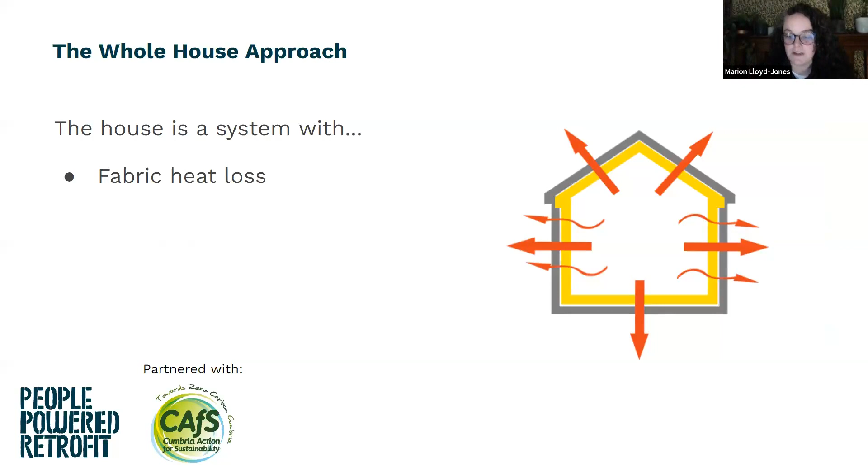So the whole house approach, let's get stuck in. So what is it? Why is it important? So houses, we take a systems thinking approach. So a house is a system made up of lots of different elements. It has the fabric heat loss - the fabric being the physical bits of the building: the walls, the floors, the roofs, the windows, the doors. And we lose heat through them.

But there's also a ventilation system, or there should be a ventilation system. This is all about extracting air that we don't want anymore, and bringing in fresh air. So this is another system piled on top there. There'll also be a heating system, because we've got to combat this heat loss that we're getting through the fabric and from ventilation losses. We need to add some heat so that we're not cold.

We also have lighting and appliances. We want to be able to see what we're doing, and we need some kind of entertainment and appliances. We've got TVs, computers, cookers, fridges, all these things we plug in, essentially.

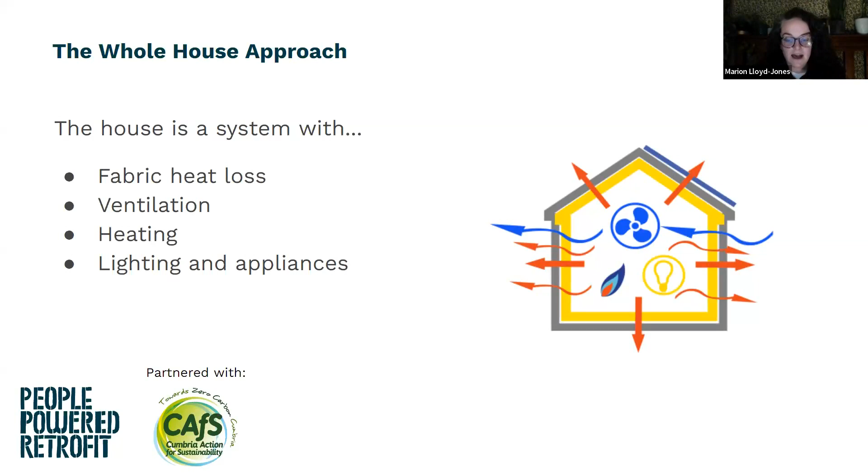And then people. So all of this we can sort of predict. We can predict how the building is going to lose heat, what heat we're going to need to put in. To some degree, we can make an assumption about lighting and appliances, and that's all. We can make calculations about that, and then it gets really complicated when we add people, because people do things differently depending on where they are, who they are, how many of them there are. But they're also adding to the system. They're adding heat from their bodies, and they're also adding lots of moisture through their activities.

And all of these systems interact with each other. They're not in isolation. There's lots of interactions, which complicates our predictions.

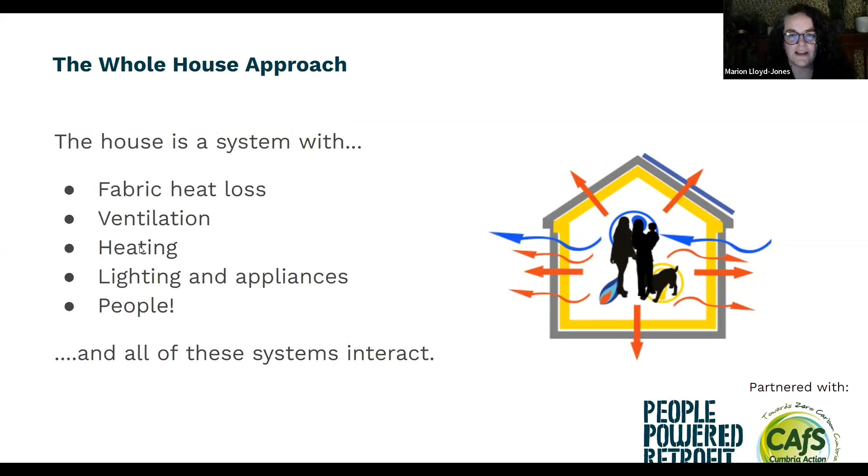Fab. Okay, George, I can see your question in the Q&A, just so you know. So why do we take this whole house approach?

So this whole house approach acknowledges that how these houses are these really complex systems. But we understand really well how these systems work and how they interact. And the whole house approach allows us to take a really context specific and a risk management approach. A lot of very clever people have done a lot of brilliant research about the risks involved in retrofitting our buildings, and we can learn so much from them.

And we can make sure that we consider all of these risks when we take on a project. It means that we can be aware of any potential unintended consequences. So if we do some air tightness work over here, are we going to introduce a moisture risk over here? We can predict that.

And it also means that we can make sure that any new measures, so any insulation or ventilation measures that we are introducing to the building, we can make sure that they're really well considered, they're really well designed, they're really well installed, which is very important. And crucially, that they are understood by the resident. We don't want to install stuff that people don't know how to use.

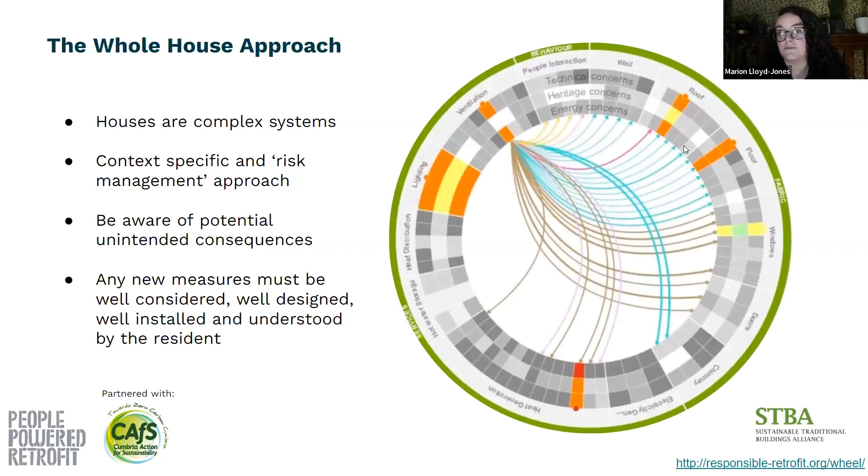It makes them useless. This is a really useful tool I'd like to introduce. This is from the Sustainable Traditional Buildings Alliance. This is their retrofit wheel.

Essentially what it does is they've looked at all the research, and they have this wheel where you can select what you're planning on doing, and it will show you the interactions between systems and measures. I would recommend looking it up. If you were to just Google STBA, I think they call it the Responsible Retrofit Wheel.

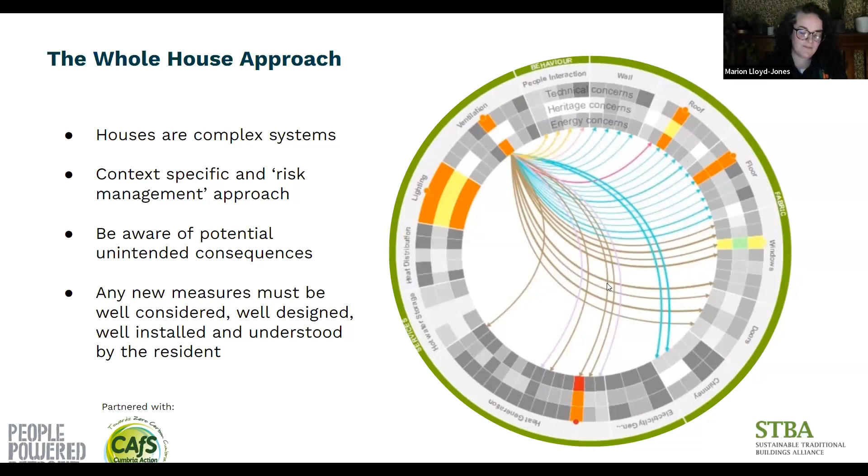Now, we take a whole house approach, and that means we can then make a plan. What do we mean by making a plan? Well, we need to get from here to there. How do we do that?

With a retrofit project, it would be lovely to say that everybody does it all in one go, but that's just not the case. In general, a lot of the projects that we do at the Retrofit Hub, people will plan as a whole house project, but in reality, it gets delivered in packages of work.

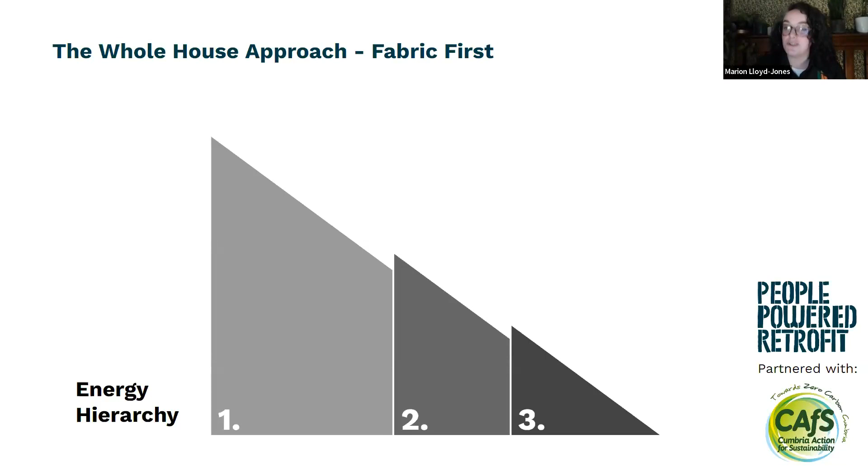So what might inform that plan? Well, we like to talk about a fabric first approach. What does that mean? Well, it basically takes into account this energy hierarchy, because it shows this is the most straightforward, the most predictable way of getting from here to there, reducing our energy needs in our homes.

So the first step, the most important step, the fabric first step, is to reduce the space heating demand for that home. What do we mean by that? Well, if we focus on fabric energy efficiency, which is a fancy word for improving the fabric of the building, we're looking at improving the insulation, improving the air tightness, and we'll come on more onto air tightness in a bit, and adding things like triple glazed windows. What we're doing is we want to make sure that that building is not losing the heat.

So that means we don't have to put as much heat in with our heating system to be able to maintain a nice, stable, comfortable indoor temperature. I always say that the cleanest, greenest, cheapest energy is the energy that we don't need to buy. And we do that by reducing the space heating demand, less energy.

The energy that we do then use, we want to use more efficiently. So we want to make sure that our heating system runs really efficiently, it's correctly sized, we've got radiators in the right place, and it's a modern heating system where we're getting as much energy out of it as possible. Things like old boilers are sort of 70, 80% efficient, the really old ones. Newer boilers, 95, 96% efficient. Heat pumps, 200, 300, 400% efficient. So really efficient heating systems we can have now.

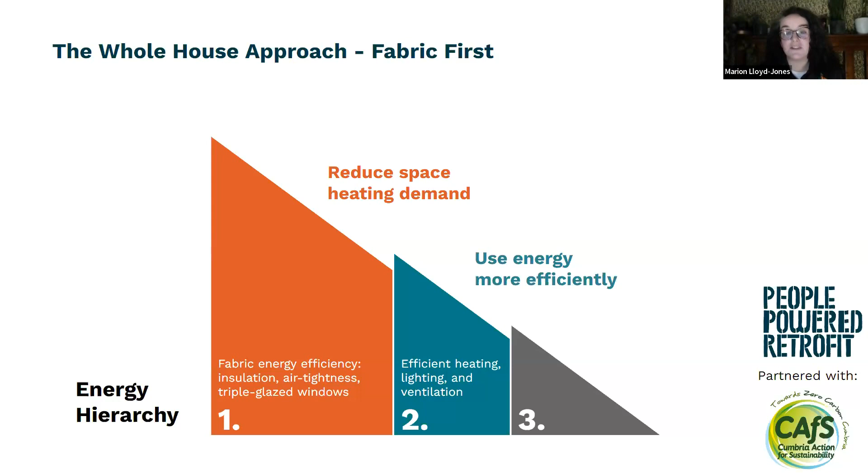And then after that, we want to make sure that energy that we're using really efficiently, we supply it from renewable sources. We want to make sure that it's the lowest carbon energy we can get. We're really good at decarbonising energy in the UK, so we're getting much better at this. And if we can supply some of that renewable energy on site, brilliant.

Solar panels on roofs, a fantastic way. But I would recommend doing that fabric work first. You definitely don't want to be dealing with having to replace a roof that's already got solar panels on - that is a bit of a kerfuffle, shall we say.

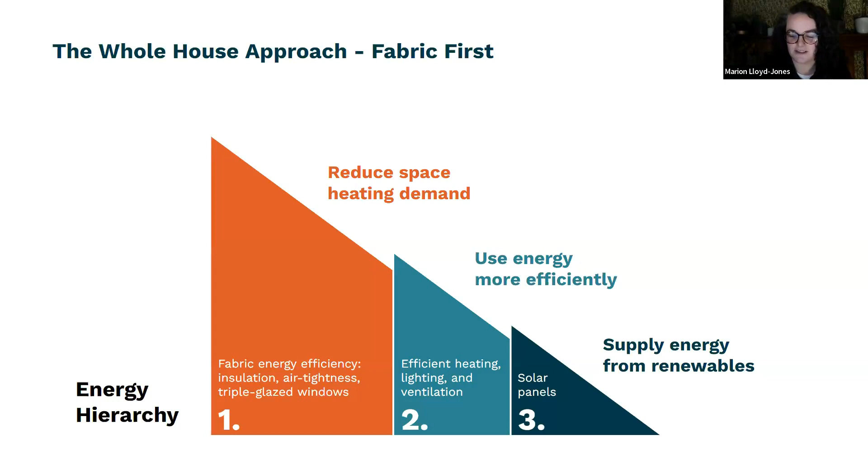So why do we want to do it this way? Well, if we've reduced the space heating demand, we can make our building services - our heating system, our ventilation system - more effective. We can also design for lower maintenance. If we make really sensible choices in our retrofit measures, it actually reduces the maintenance needed on a building.

If we externally insulate, for example, we don't have to worry about repointing on a regular basis. If we install really high quality windows, we can make sure that we don't need to do so much maintenance on those windows. And this runs through a lot of the measures that we can install.

We have really reduced our ongoing running costs. We need less energy, we're much less sensitive to fluctuations in the energy markets. We can improve living conditions, we can have really nice indoor air quality, we can have nice, warm, comfortable homes. Our homes are making us poorly at the moment.

We spend 90% plus of our time indoors. We should have really nice indoor environments.

Also, working this way, we can really reduce fuel poverty. If we're reducing the amount that we need to spend on our energy bills, then people are less sensitive to shocks in the energy market. They're not spending as much of their income on energy.

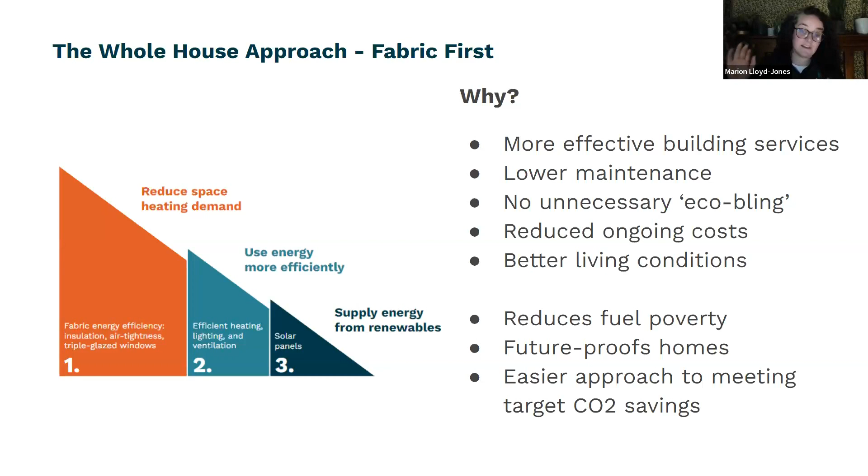There's lots of different ways we split buildings up, but generally we say pre-1919 - that's, for us in Manchester, generally your red brick solid wall properties. That would also cover a lot of your stone built buildings.

And then we hit the interwar years, 1919 to 1944. A lot of that is your early cavity walls, a lot of the buildings that were put up in those interwar years. And then after here, we tend to see a big...

There's a lot more different bands after here, basically, and a lot of these are tied to building regulations, which didn't start mentioning energy until 1965. That's when we first had targets for insulation in properties. And what we would hope to see is that buildings built from then on, as there's been improvements in the targets from building regs for insulation and airtightness, they should be better buildings from that point on. I won't go into why that's probably not the case, unfortunately.

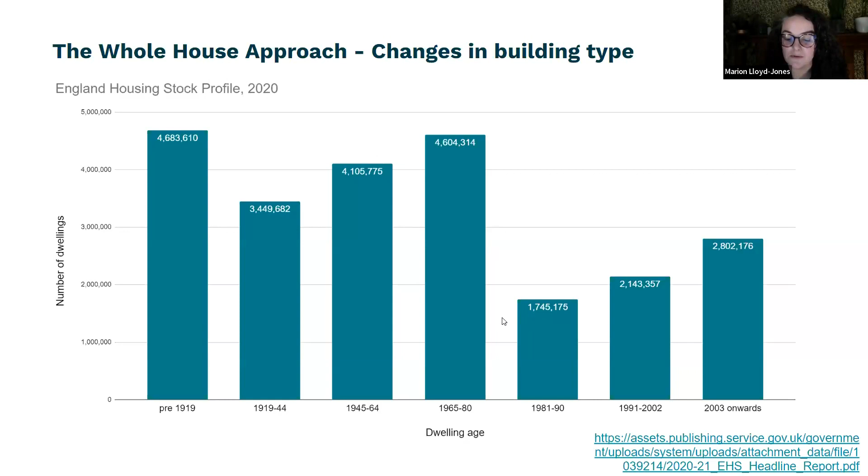So why is this important, the age of the house? Well, fundamentally older and newer buildings are built differently. Older houses, especially pre-1919 and interwar houses, were built to be heated by coal fires or wood fires. You wouldn't expect to be warm unless you were sitting in front of the fire.

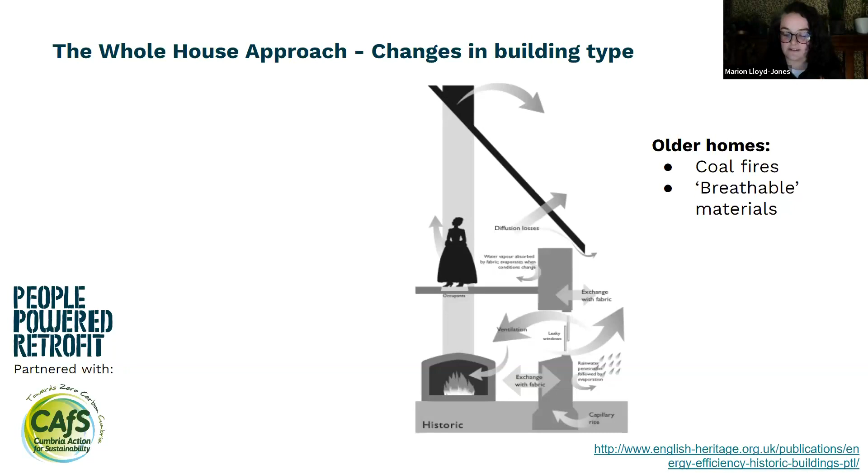They were made from traditional materials, so we call them breathable materials - I'll come on to that in a bit, what I actually mean by breathable. But the important thing is the materials were very different: traditional materials, lime mortars, lime plasters, that allowed moisture to move around the building in a very different way to modern buildings.

And modern buildings, very different. We don't heat with fires, we heat with central heating. We expect the whole house to be a nice even temperature all the way around. We no longer have single glazed windows, we have double glazed, triple glazed in retrofit houses and more modern houses. And we've done a lot of draft proofing, especially through the 80s and 90s and early 2000s, because we realized we do not like drafts.

And what it doesn't say here is the materials that we use now, more modern building materials - your gypsums, your concretes, your cements - they do not allow moisture to move in the same way. We are changing the mechanics of the buildings.

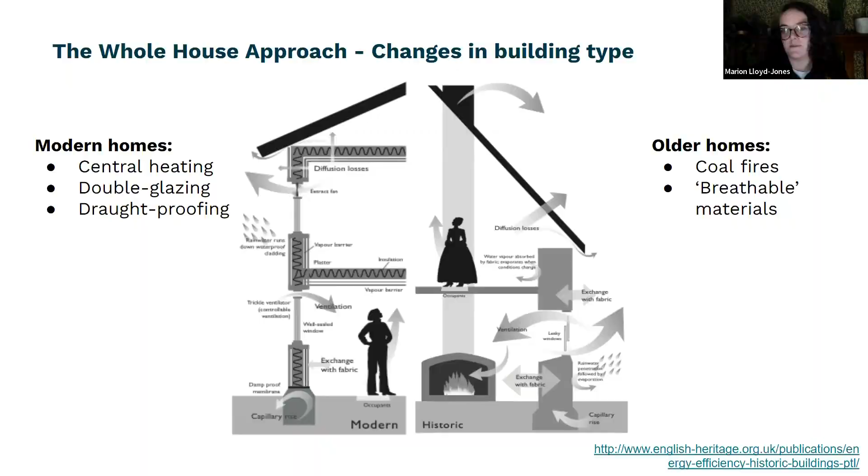So I'm going to now do a knowledge check, a couple of these as we go through. I'm going to ask you a question and I'd like you to put your answer into the chat, but don't hit enter yet. I want everybody to have a go, give me an answer, and then when I say go, everybody hit enter, and then I'll be able to see what's going on. Your first question is, just to check you've been listening: what does it mean to take a whole house approach? I'll give you a little minute.

Okay, if you've typed something in, hit enter now. Let's see what we say. The fabric of the building, house and system, looking at all the interacting systems - yes, viewing the whole house and system fabric first. Excellent, there's people in the room and they're listening. Marvelous. Okay, you all pass.

Let's talk about how heat moves around our homes. I'm sorry Tina, I realized I didn't take a note of what time we started - just so I don't get too excited and talk about any one thing for too long. Don't worry, that's fine. We started a bit late, so I think if we carry on till about 8, if that gives you enough time, but if you run over slightly don't worry. I might need to go a little bit quicker through some bits, but that's fine.

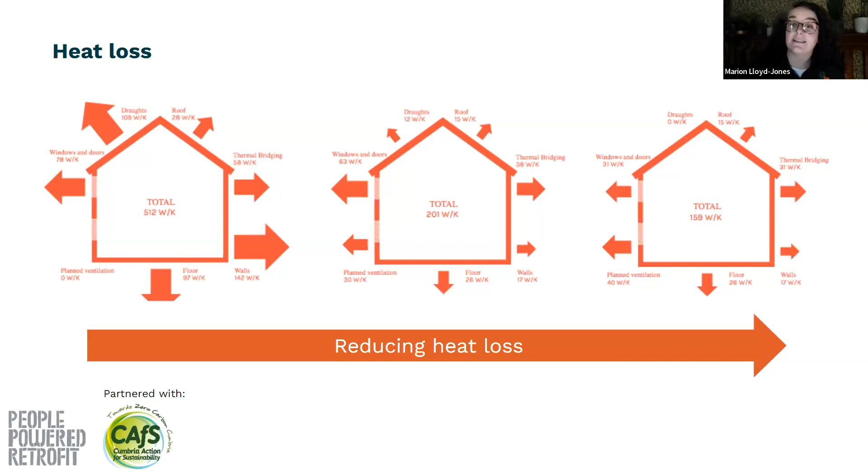Okay, heat - talking about how do we lose heat from our buildings. These are graphics from the Home Energy Planner report, an assessment tool designed by People Powered Retrofit, which is used by CAfS to do energy assessments around Cumbria. This basically shows you, of all the different bits of the building, where it's losing the most heat, so you can get an idea of how to best target your retrofit interventions. The idea is you look to reduce heat loss from as many of those places as possible. This looks at both fabric losses and ventilation losses, so there are losses here for planned ventilation and losses from drafts. Drafts and ventilation are two very different things, which we will come on to later.

It's not just about heat loss though - we're always trying to balance the losses against the gains. What are the gains? Gains come from lots of different places. We get heat gains from us - every person that's in your house is emitting, in general, about 100 watts in heat just by being there.

Your pets will also be emitting heat. It will depend on your activity as to sometimes you'll be emitting more heat, less heat, depends what you're doing. We get gains from cooking, and anything that's creating heat in your house, either intentionally or unintentionally. So when you're cooking, when you are on your laptop watching a webinar like this, your laptop, your computer is going to be emitting heat as well.

And we also get solar gains. So when the sun is coming in through our windows, we're getting some of that heat into the house as well. And we balance these.

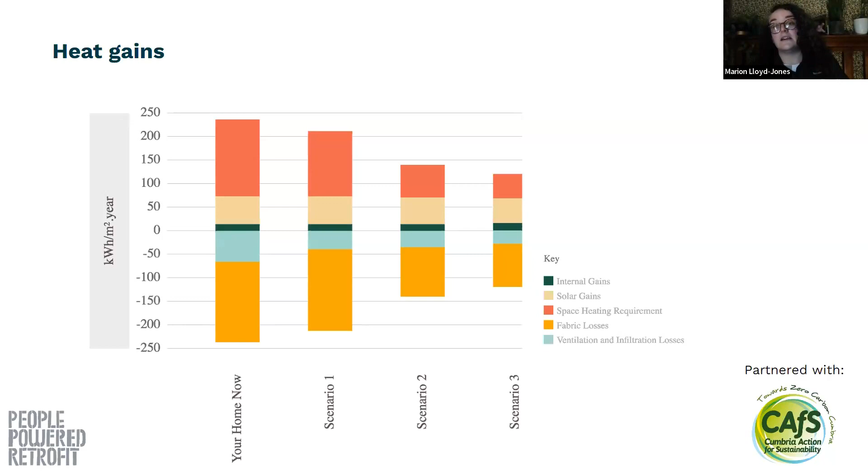This is another graph from the Home Energy Planner reports. What we see is everything above the line is a gain, everything below the line is a loss. So the yellow is the fabric losses, the greeny blue are the ventilation and infiltration losses. Then we get a bit of a gain - the big gains at the top, that's the space heating requirement. So that's how we need to balance the losses and the gains to get a nice stable temperature.

So space heating demand is a really important metric here. It helps us to understand how different buildings perform against each other and what is realistic. So the UK average is about 140 kilowatt hours per meter squared, kilowatt hours being the amount of energy you need to put in. A kilowatt hour is what you'll see on your energy bills. So it's kilowatt hours per meter square of the floor of their building per annum.

That's the point. Building regs has a target energy efficiency rate of about 100 kilowatt hours. It was in 2000, and that's gradually coming down to about 65.

And then there are various standards you can look to, like what is a good heat loss, a good space heating demand to aim for. So the AECB, that's the Association for Environmentally Conscious Buildings, a very good organisation, I recommend looking them up. They have a retrofit standard - their retrofit standard aims for 50 kilowatt hours per metre squared per annum.

That's the retrofit target, I think. And they have a new build target, which I think is 40. And then we have Enerphit, which is the passive house standard for retrofits, and that's 20 to 30 kilowatt hours. And then passive house, which is the standard for new builds, but that's basically the super low target - it's 15 kilowatt hours per meter squared per annum. That's tiny compared to the UK average of 140.

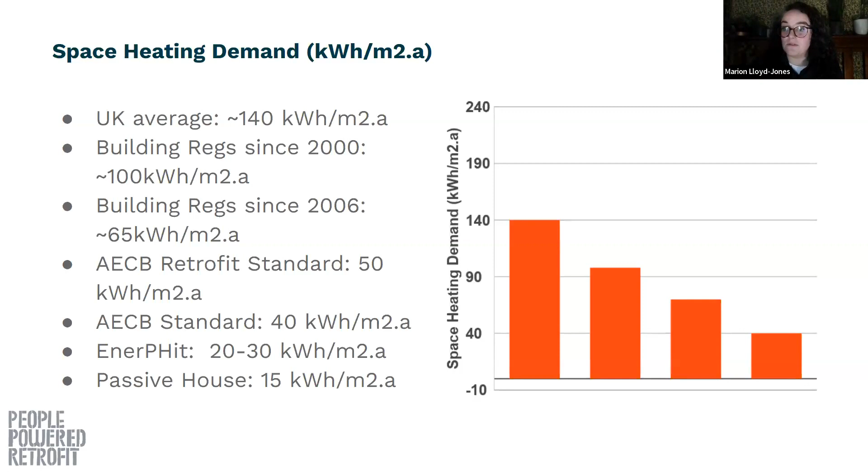I delivered some training up in Aberdeen last year, where their average up there is sort of 250, 300. Wouldn't surprise me if you have a very similar average for Cumbria when we're thinking about it - it's that bit colder, that bit wetter, and it's a different type of buildings. In Aberdeen, it's lots of granite build. I know in Cumbria you have a lot of stone buildings, so you will often have a lot higher space heating demand.

Lots of things play into it, not just what the building's made of, but also what we call the form factor. This is just a ratio between the floor area and the external wall area. The more external heat loss area you've got, the worse your form factor is, the less efficient it is.

Essentially, if you've got a flat that's in the very middle of a building and the only external wall you've got is on the front where your windows are, you've got a lot less surface area to be losing heat from than if you're in a detached bungalow. That's what this is saying about.

You can choose your form factor when you're building a house. There's not a lot you can do about it with a retrofit, but you can think about it if your retrofit also includes some construction work. For example, if you're looking at doing an extension or a conversion, you might be able to tweak that to try and improve your form factor as you go, which will reduce your heat loss area.

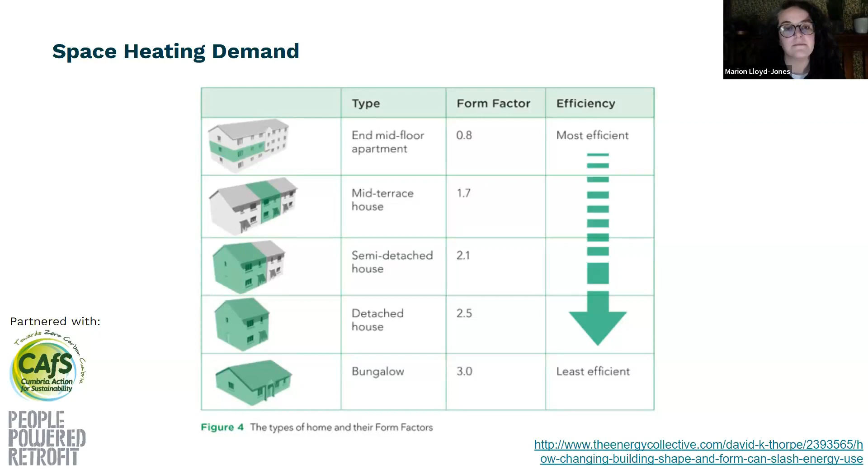Other things that we might look at: peak heating demand. This is the rate of heat input you need - so on the coldest day, how much heat you need to put in. It's not that interesting by in and of itself. What it's basically looking at is for sizing your heating system.

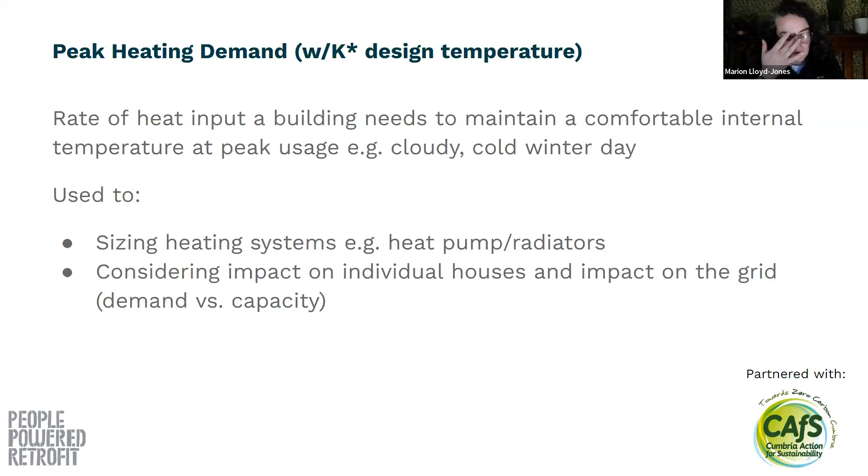We want to try and make our peak heating demand fall into bands, especially when you're looking at whether you can switch to a heat pump, for example. This is very much used when you're sizing heating systems. What's possible in retrofit?

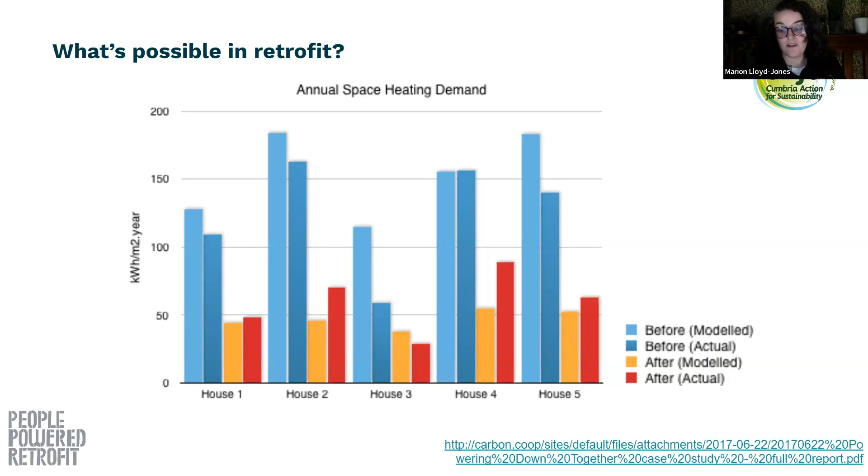This graph showed there was a difference between modelled and actual results. This is very important post retrofit because unless you're very careful, you can end up not reaching your goals because of the performance gap. What this basically describes is that difference between what you modeled and what you actually got. And there are a few reasons why we get this performance gap.

It's very often to do with assumptions that are made at the beginning that aren't necessarily close enough to reality, attention to detail in design, and quality control during construction. You can put as much energy as you like into designing the perfect retrofit, but if what you have designed is not what is installed, you will have a performance gap.

If you have designed for a really high level of air tightness, but your contractors don't understand how to install to that level, you will not hit your targets. So it's really important that what is designed is what is installed. Making sure there's suitable commissioning and handover, making sure that what is installed works the way it's supposed to, and making sure the householder knows how to use it.

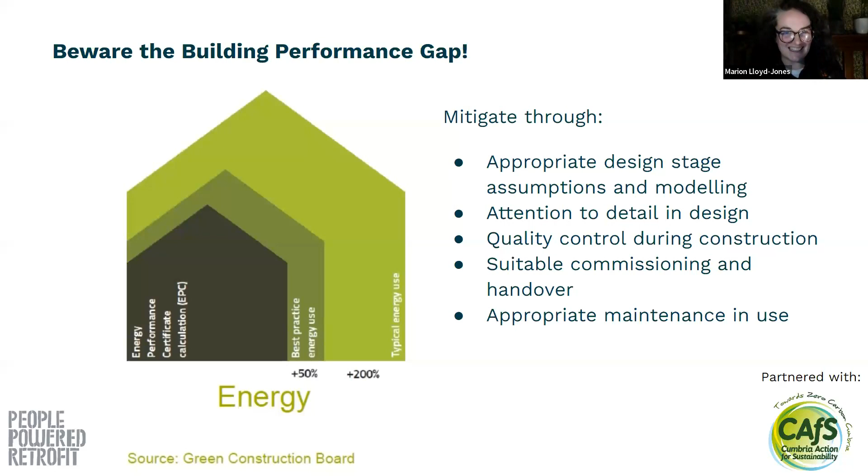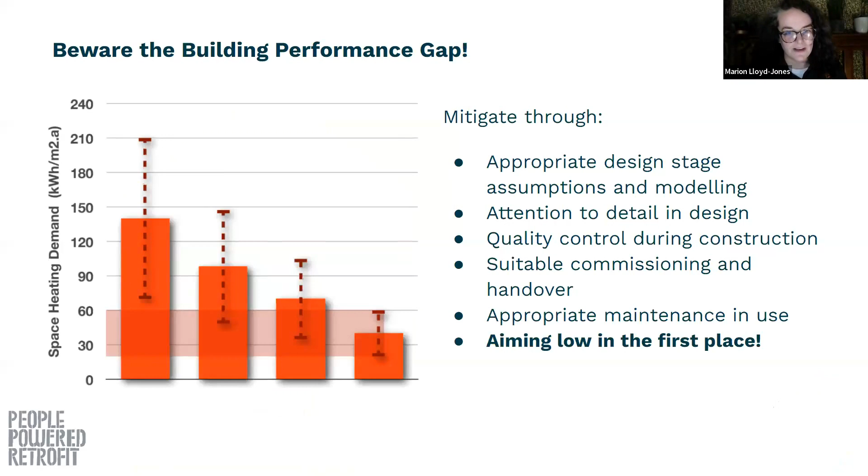And here we go, this is showing these error bars, the difference we can get. That performance gap can cause a really big fluctuation in performance.

So I'm going to do another one of these knowledge checks. What does space heating demand mean? If I'm talking about space heating demand, what is that? Answers in the chat, please.

Okay, hit enter if you've typed something in. Let's see what you got. How much energy it takes to keep the house comfortable. Perfect, that's exactly it. How much energy do we need to put in to keep a nice, stable, comfortable temperature?

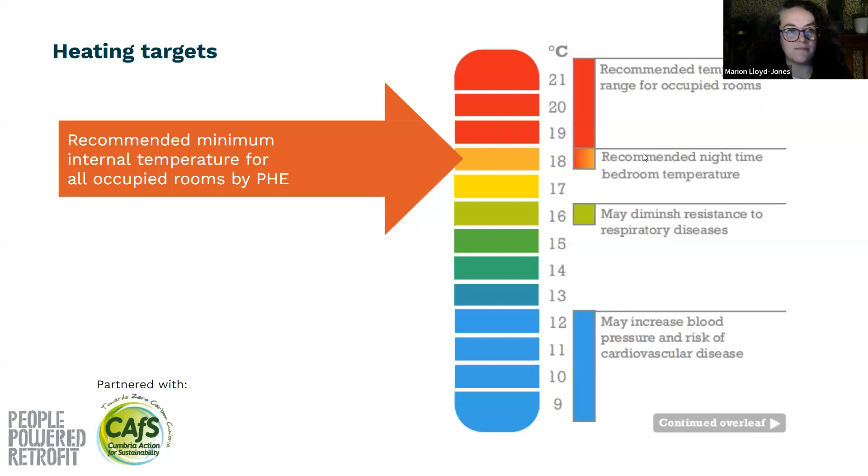Okay, so I'm going to do a bit about heating. Heating level is everybody has a preference for where they set the thermostat. We used to have battles in our house whether it was going to be 19 or 17. We now settle on about 17 and a half.

There's a lot of research that's gone into this - what is actually a sensible temperature? We want to advise people it should ideally be above 18 degrees for most of your house, slightly cooler in your bedrooms because we sleep better in a cooler room, but we don't want to go too cold. Under 16 degrees can really start to cause health problems, but it can also cause problems with the fabric of your building. The colder your building fabric is, the more likely you are to get damp and mold. But it's also really important for human beings to be warm enough.

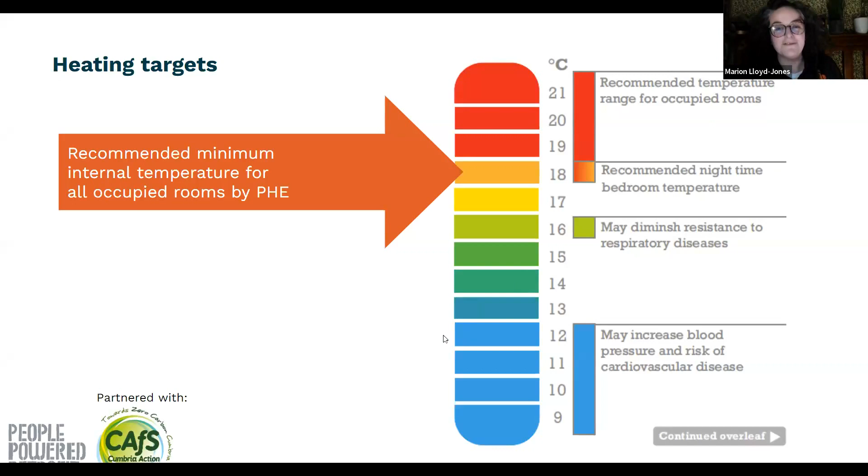But the way that we perceive warmth is quite interesting. A lot of people find it interesting, but I think it's really important to understand the way we perceive warmth and how comfortable we are. It's very individual, but it's also affected by lots of different things. The way that we measure temperature is generally air temperature - that's what a thermometer often picks up.

But I want to show the difference between these two locations. We've got someone standing in a sunny but windy area and someone standing in a shady but calm area. The air temperature in both locations is 22 degrees, and the relative humidity in both locations is 80%, but the wind speed is different, and the radiated heat is very different. So these people are going to feel a very, very different temperature in these two locations.

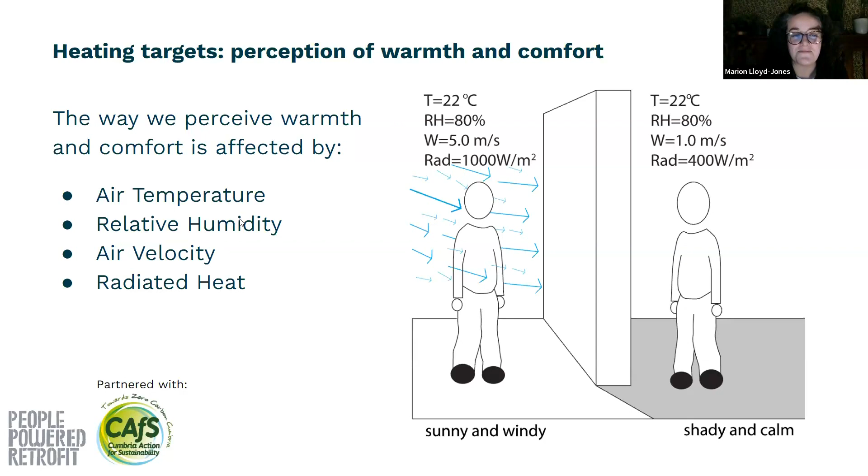Different people perceive heat slightly differently. But it's not strictly the temperature, it's got lots of other factors involved. What does that mean in our houses? Well, let's come on to that.

So when you do physics at school, they tend to teach you different ways that heat is transferred. There are four main ways: conduction, convection, radiation, and latent heat or sensible heat. I'm going to concentrate on conduction and radiation.

Conduction is about how heat transfers through a solid. If you stick your metal teaspoon in a hot cup of tea, the heat will move along that spoon to the end and will eventually warm up. It's all about particles vibrating next to each other and passing the heat along. This is how heat moves through the physical fabric of the building.

And we're going to talk about radiation, radiative heat, specifically in terms of surface temperatures, how we perceive temperatures around us. So this is an image from a thermal imaging camera. When we talk about temperature, we're normally talking about air temperature, but this is really important - this is showing us the radiated temperatures around us, how different surfaces are different temperatures.

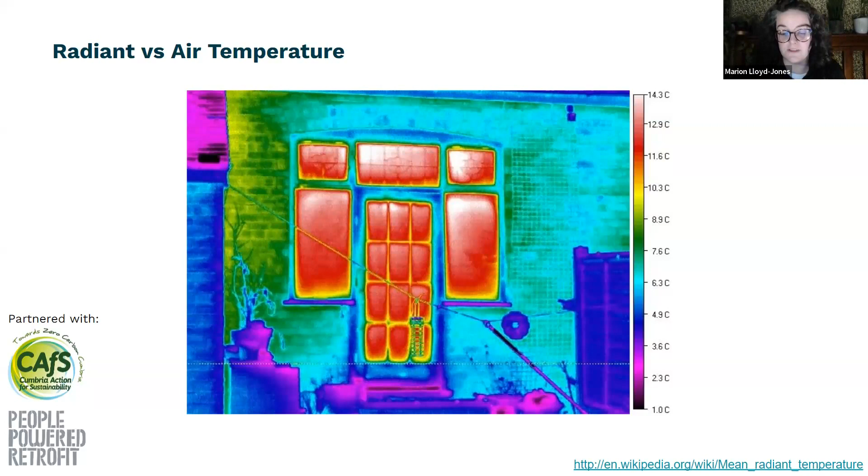Everything that's above absolute zero is radiating heat, in quite small amounts, but everything above absolute zero is radiating some heat. We can see from here that the warmest areas in this image are about 14.3 degrees, the coldest is down to one or two degrees, but it's all radiating some kind of heat. This doesn't tell us anything about what the air temperature is, this is just what these surfaces are at.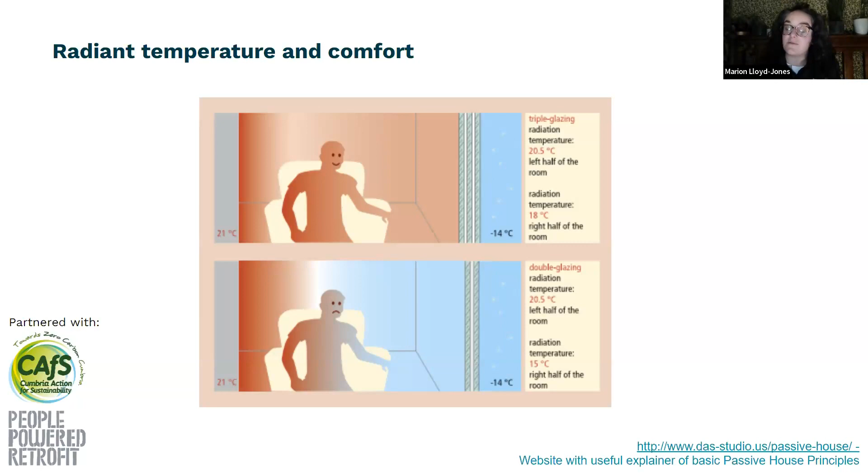We feel it's this radiated heat that we humans are very sensitive to. If you think in really warm countries across the Middle East, for example, you will often have large pools of water because they help you feel cooler, because the surface temperature of the water is a lot cooler than everything that's around you. The air temperature hasn't really changed, but there's a much cooler surface, and you'll feel cooler. So how do we improve comfort?

Well, the answer to this is insulation, and it does this in two ways. Adding insulation to the building fabric reduces the heat loss via conduction through the fabric because it slows the heat transfer. But it also raises the surface temperatures inside. So whether you're insulating internally or externally, the internal face of that wall is going to be a lot warmer, so you won't have that cold surface making you feel colder.

Sorry, I'm just checking the notes on it just to make sure. Yeah, so it doesn't...

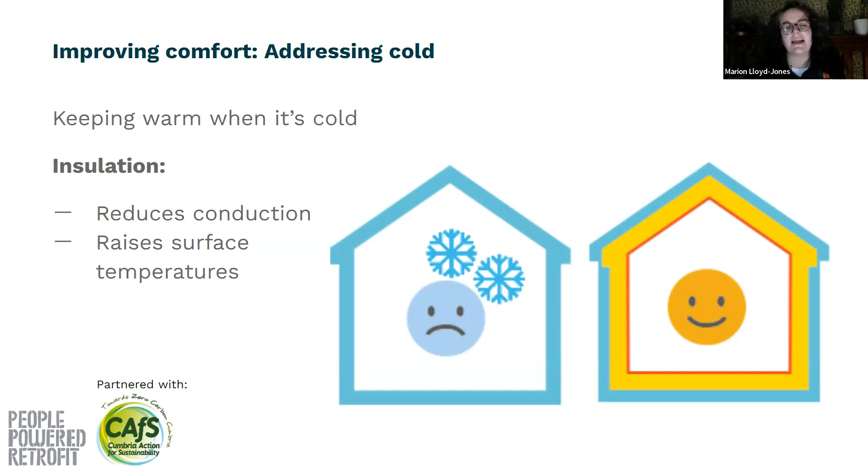...affect the conduction and the radiation temperature to the same degree. It's much more about slowing the heat through, but you will notice if a wall previously had been particularly cold, it will feel warmer once it's been insulated.

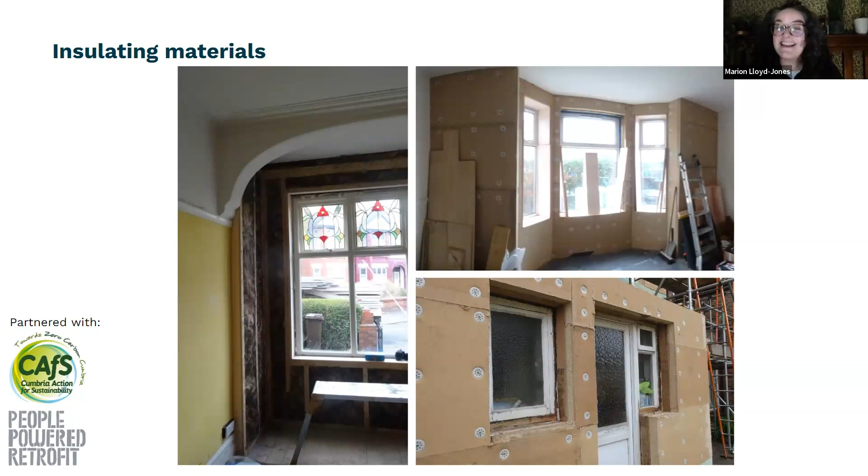Here's some examples of internal and external wall insulation. This one on the left is internal wall insulation, mineral wool between timber battens. Top right is wood fibre insulation internally, and bottom right is wood fibre externally. It doesn't matter where you put it, as long as it's there, it's going to slow the heat loss through that wall and warm up the internal surface.

But it's not just about staying warm in the winter, it's also about staying cool in the summer. If we've got insulation on that wall, it's going to slow the heat coming in during really warm summers. We've had some scorching summers over the last few years—not this year, this summer was a bit of a washout in Manchester. I don't know about Cumbria, but we have had some warm summers recently.

We can think about the position and amount of windows and glass if we get the opportunity to change that, so we're not getting that solar gain. We can add shading, but we can also choose materials that slow down the heat coming in. A really key place to think about this is in a loft conversion. Some materials you might use there are good for retaining heat in winter, but not very good at keeping excess heat out in summer. I go into a lot of really scorching loft conversions in the summer.

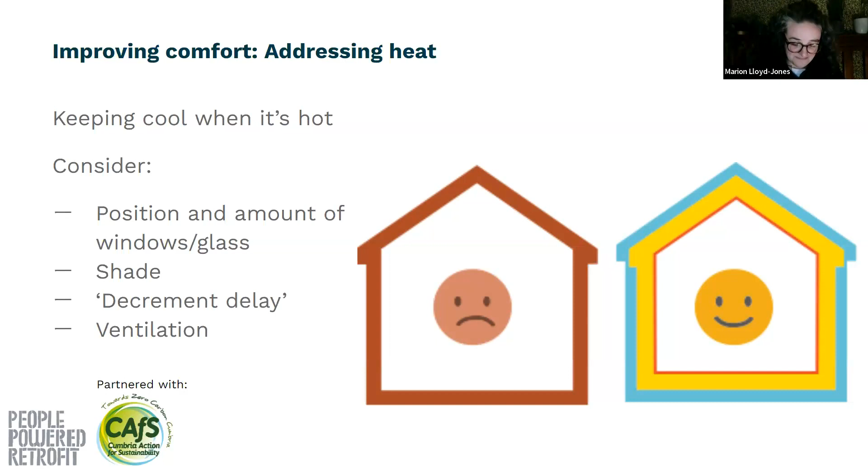And we can also address heat through really good ventilation. So heat and air, right? I'm going to have to speed up, so bear with me.

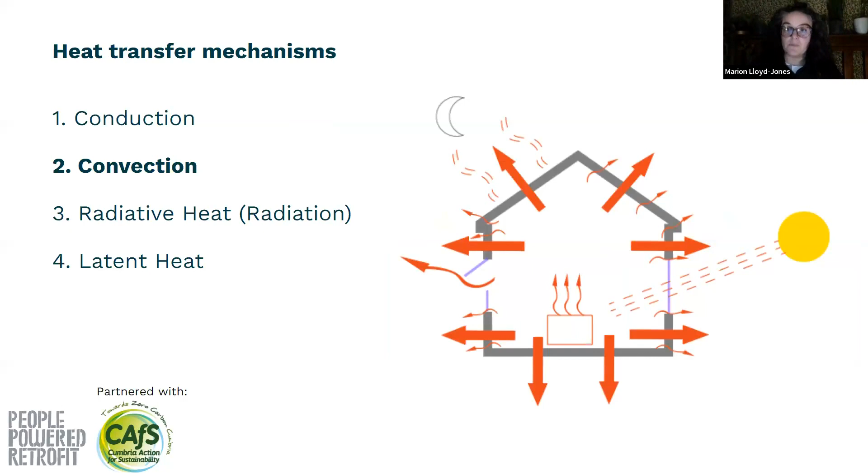Convection is one of the other types of heat transfer that we didn't talk about. Convection is the movement of air. This is where warm air gets more gap between the particles, making it more buoyant. Warm air rises, then it cools and falls, and we end up with these convection currents.

Convection heat loss is really important because we lose heat through various mechanisms: thermal bypass, chimney effects, drafts, and ventilation. I'll go into each of these.

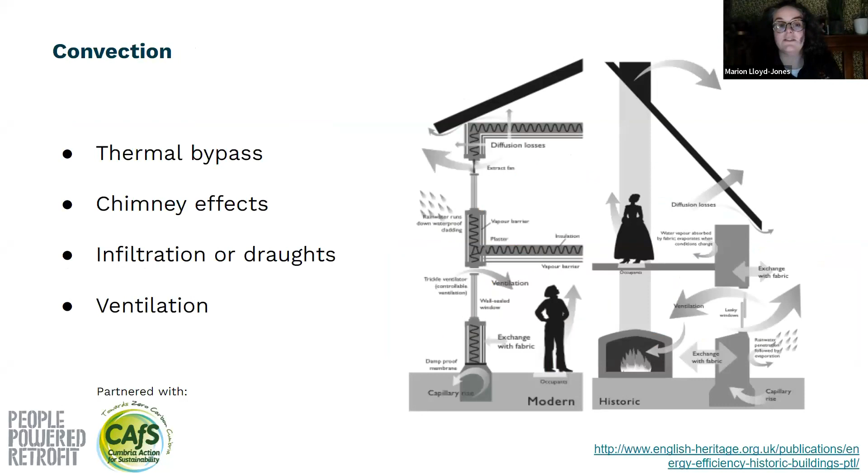Thermal bypass is a little complicated, but essentially it's about gaps and air movement around insulation—air movement stealing the stored heat from your insulation. Sometimes it's called wind washing. This is why we'll often cover insulation with a membrane if it's not being covered over with plaster, for example under a floor or in a loft. It's also really important that insulation is well installed so there aren't gaps for air to get in and remove the heat.

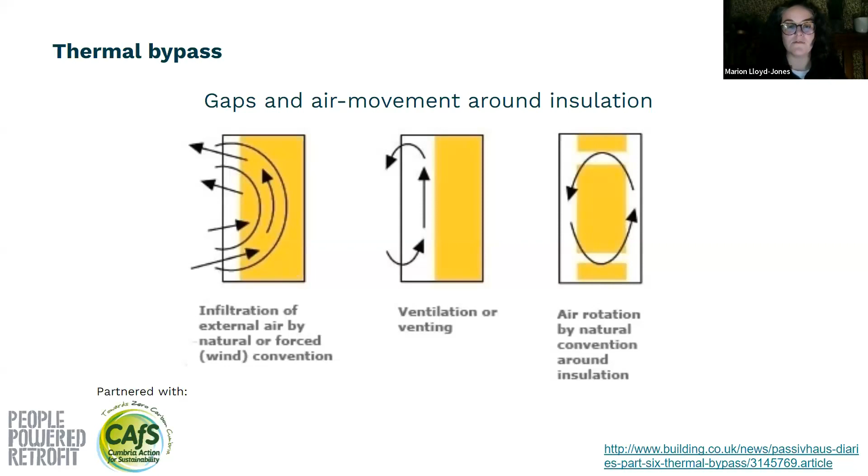Chimney effects—I think most people are comfortable with this idea. Chimneys are designed to draw air up them so we don't fill our houses with smoke. They do this because warm air is more buoyant. If we're not careful, we can end up with a chimney effect through cavity walls, where warm air from our homes gets into the cavity wall, rises up, sucks more cold air in from the bottom, and we end up with this cycle of losing our warmed air up the cavity wall.

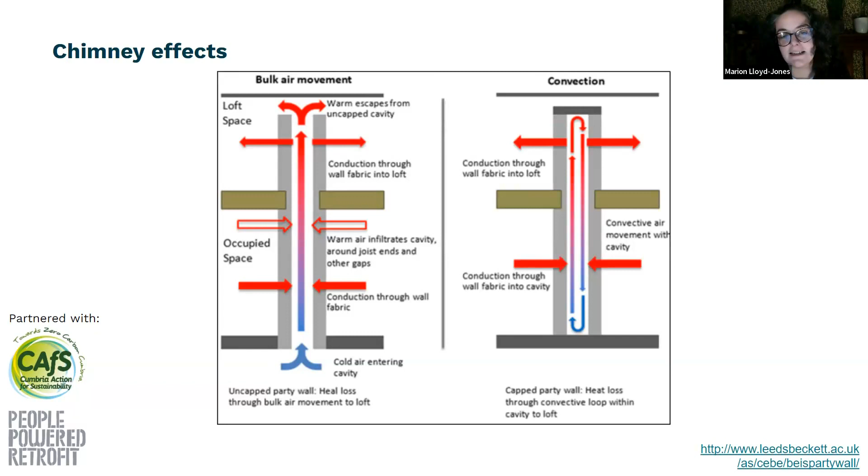If we cap cavity walls off at the top, we end up with a convection current through them, but hopefully we're gaining that warmth back into the house rather than losing it straight out the top like it's going out of a chimney.

I said earlier that drafts and ventilation are two very different things. They are—so on the right, ventilation is planned. This is about providing fresh air into our homes and extracting moist air, removing water vapor and pollutants. Infiltration is drafts—this is air coming into and out of our homes, so it goes both directions.

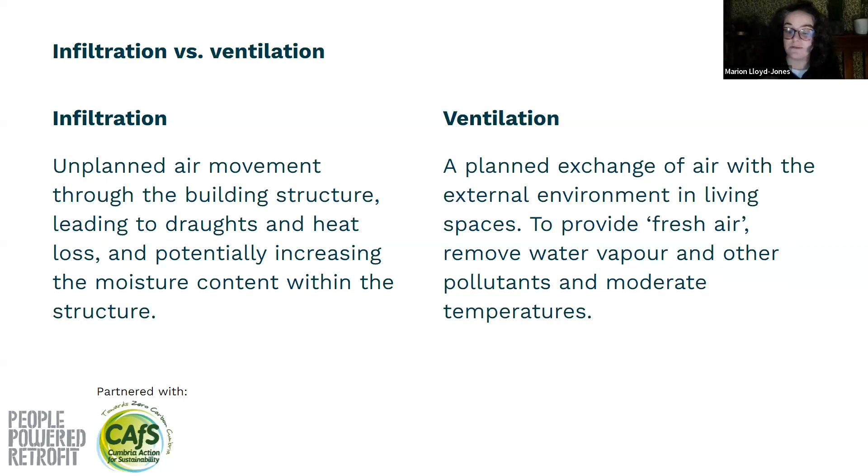We don't like that, and we get degradation of the structure because we end up with moisture moving around. We don't want that. In a house with high levels of air tightness, we're really making sure we're keeping that heat in, not just through a really well insulated structure, but by keeping those drafts out.

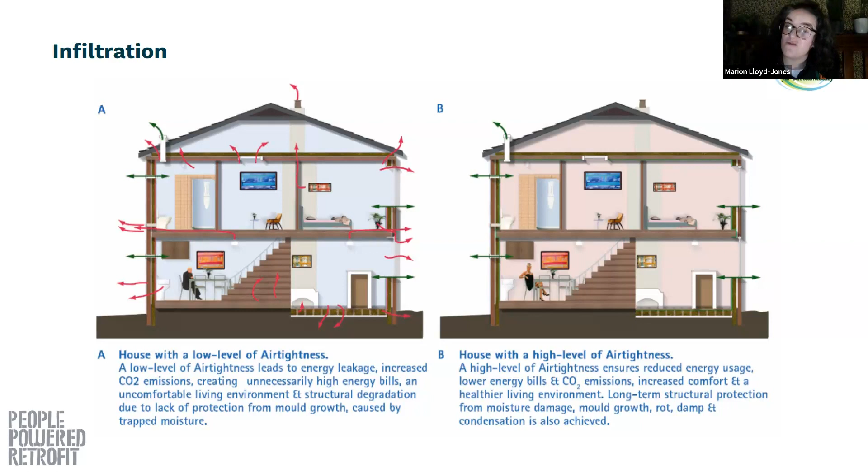We're controlling where the air is going out, so where our extracts are, and where our air is coming in. I always say I don't really want to be breathing air that comes from under my floor or in my loft. I want nice, fresh outside air. And we can also really make sure any system is working well if we've got good air tightness.

We can measure the leakiness of our buildings through air tightness testing. This is Gervais, who's an air tightness specialist doing a blower door test. You have some really good people doing air tightness up in Cumbria - I think Diane Hubbard is probably doing some of these webinars. She's fantastic. Her company is Green Footsteps, and she does air tightness testing.

Essentially, what you do is put one of these in - it's called a blower door test. You put this in your door, it's got a big fan, and it sucks or blows air in or out of your home, forcing air in or out through all the little cracks and gaps. You can measure how much air is being lost.

There are lots of targets because we can quantify it. The metric is called air permeability - this is how leaky your house is. Low numbers are good, meaning it's less leaky. The average house is between 12 and 20. Won't worry about the units, it's very complicated. Building regulations need updating actually - it used to be 10, it's now 8. Good practice would be 5.

And right down at the bottom, passive house - on a passive house, you're not allowed to have an air leakage of more than 1. So if you compare the average of 12 to 20 with a passive house of 1, our houses are ridiculously leaky. Older houses were designed to be leaky because they had fires in and needed the fresh air. But now, as we've tightened everything up with air tightness works, we should be getting down to these really good, tiny numbers.

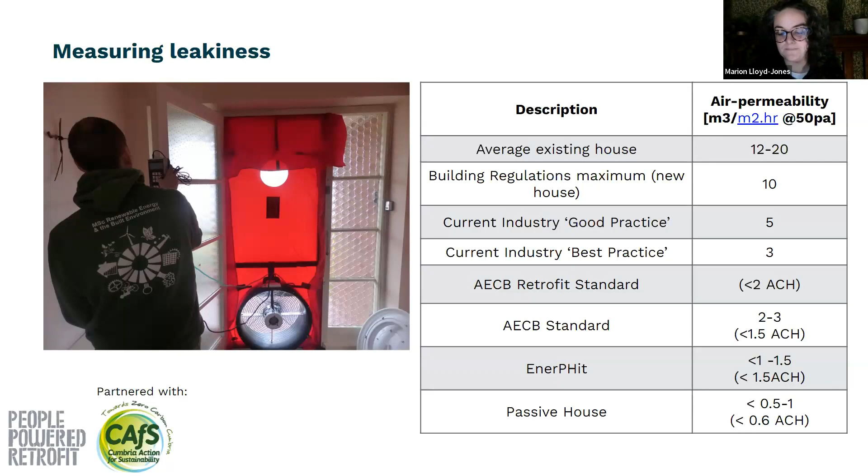How do we do it? There are lots of things you can do to improve your air tightness. This one here is filling the gaps between floorboards. Ideally, you want to deal with air tightness and insulation at the same time underneath your floor if you've got a suspended timber floor, but if you can't do that, fill the gaps between your floorboards.

The bottom left shows some pretty serious air tightness works - this is taping, with a membrane and tape going around, possibly a joist. And on the right, examples of taping and membranes going around pipework and other penetrations - pipes, wires, all these kinds of things.

I think what's important to take from this is air tightness is really important. There are lots of products and methods available. Your air tightness strategy should be part of your whole house plan - it can really make a difference. If you do nothing about the air leakage from your house, you're missing a massive part of the heat loss, and you will not hit your targets if you don't also deal with air tightness.

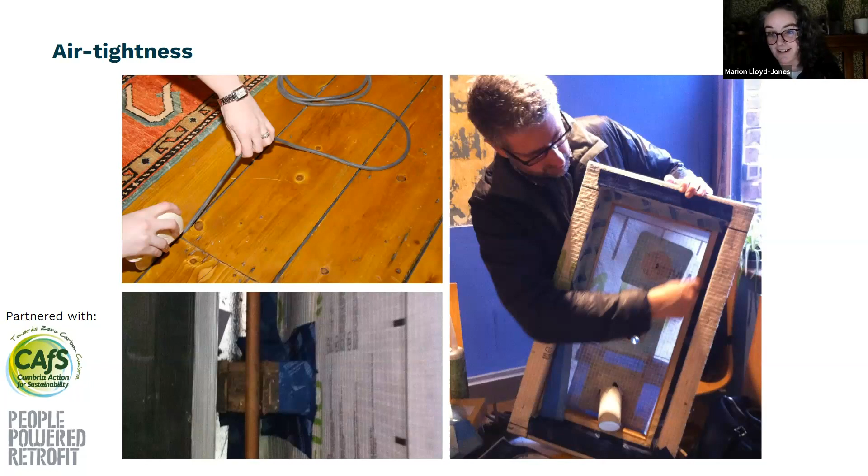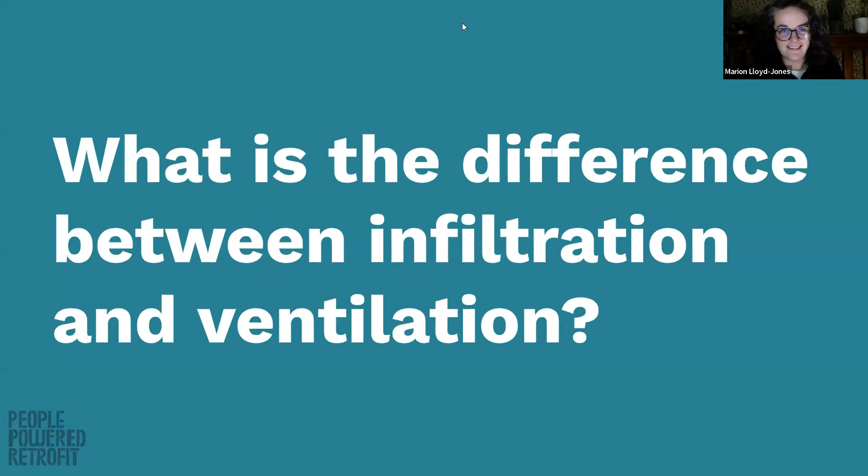So, knowledge check - what's the difference between infiltration and ventilation? Put your answers in the box.

Ventilation is planned - absolutely, unplanned versus planned, that is exactly it. Ventilation, good. Infiltration, bad.

Lovely, okay, moisture - this is really important. If we think about heat but we don't think about moisture, we are going to have these unintended consequences that I spoke about at the beginning. Most of the unintended consequences of retrofit are to do with moisture. Moisture is not something we want getting into the fabric of our buildings - damp, mold, degrading structure, all bad things. We can plan to avoid issues with moisture, and we definitely should be doing.

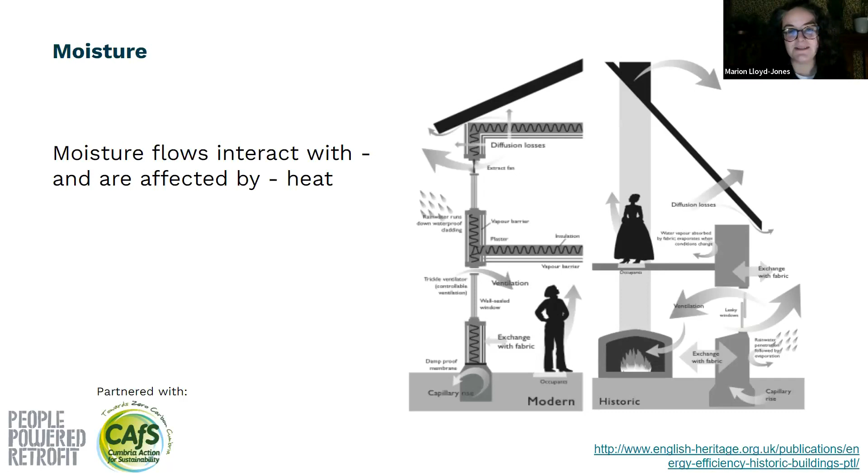So moisture flows interact with and are affected by heat. What does that mean? Well, if we think about the different ways heat moves, thinking about air movement, ventilation, infiltration - moisture is in the air and will get moved around with air as it moves around our homes. But moisture also moves in and out of the building fabric, as it was supposed to in traditional buildings, but can't so easily in newer buildings. I'm not going to play this video, but I recommend you look it up.

I'm sure CAfS probably have this in multiple places on their website, and they will point you to this. It's a fantastic video by the UK Centre for Moisture in Buildings. It talks about all the sources of moisture in our homes, what the effects are, and what we can do to manage moisture.

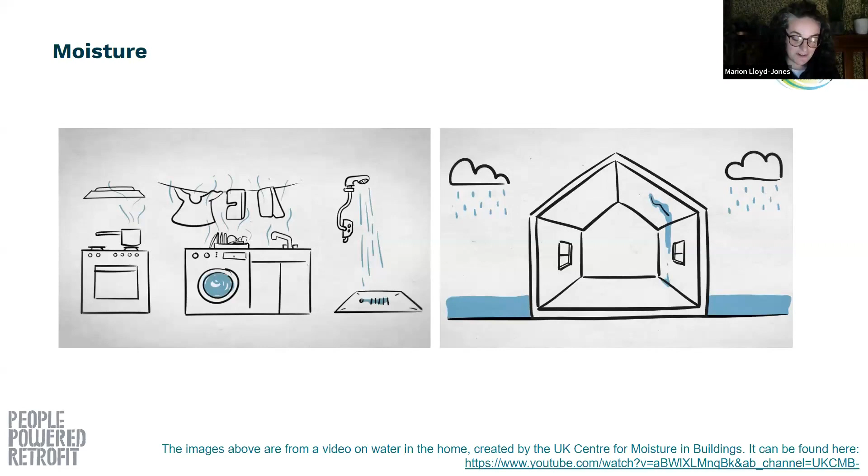There's moisture from outside the home, moisture from inside the home, and it also explains relative humidity - what is it, why is it so important. I won't go into it now because I'm tight for time, but go and have a look at this video. I use it in all the presentations I do about moisture.

So, moisture on the building fabric. When moisture gets into the building fabric, I think most people have dealt with this at some point. This is what happens when we have lots of moisture in the air inside our buildings, and we've got a cold bit of building fabric. We all know that if you go up to a piece of glass and breathe on it, we get condensation on the glass.

The exact same thing is happening, condensation on every surface in your home if it is cold. And it doesn't have to be super cold - it just needs to be about 5 degrees colder than the air in the room. So if your internal air is about 20 degrees, and there's a surface in your home that's about 15 degrees, you are very likely to get condensation. If you have enough condensation on that wall, you will get mold, this black mold so many of us are so familiar with.

It's very frustrating.

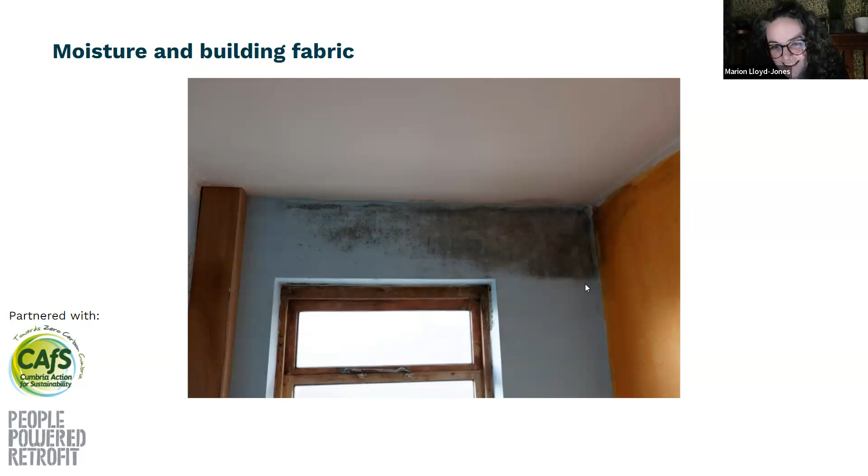This is a quote that gets used all the time: any retrofit project that does not consider ventilation is a condensation project. We deal with this excess moisture in the air inside our buildings. It's not excess, it's nothing you're doing wrong - just by being a human being inside a building, you are producing moisture. We breathe moisture out, we like to wash, we like to cook - all these things create moisture.

As soon as you start putting modern impermeable insulation on them, you trap the moisture inside that wall and it can't get out. Which is why you should use the correct insulation for your wall - if it's a solid wall, it will need to be, call it a breathing insulation. I wouldn't use that term - I would use a vapor permeable insulation material, something natural or breathable.

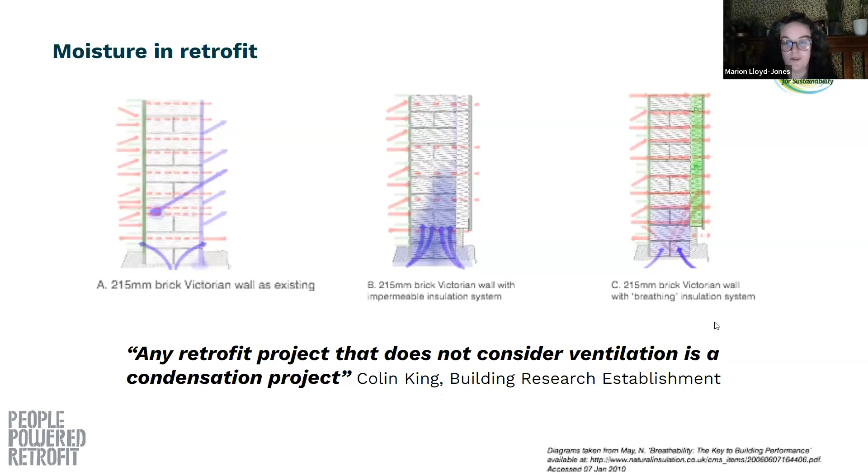When we say breathable, we're not talking about air, we're talking about moisture - it's the wrong word, really. A construction, a building, can be airtight and breathable - it's all to do with the size of molecules. If you're interested in the science, I find it very interesting - go and read about it.

There are various mechanisms that we talk about moisture in buildings. You may hear these terms: vapor permeability, hygroscopicity, capillarity - various ways that moisture can move around buildings. As householders, you don't really need to know the science of these things, but you can go and read about it if you want to.

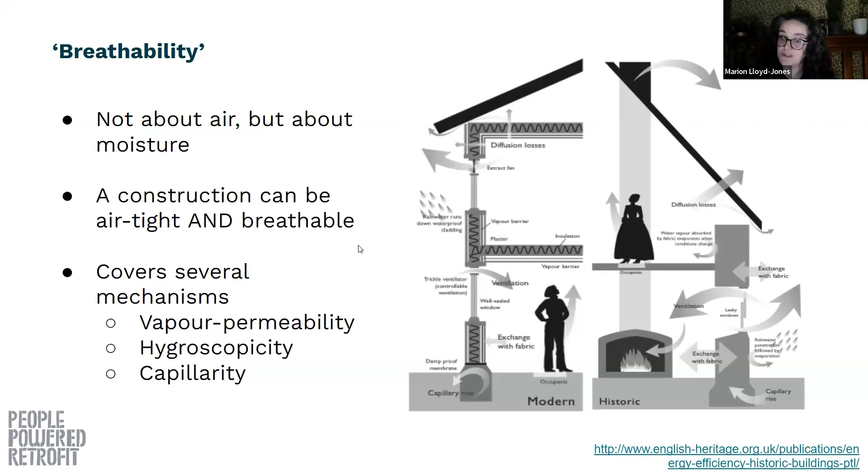What you need to understand is that your retrofit project must consider how moisture currently moves around your building, how your retrofit measures may affect that, and how moisture is going to be managed afterwards. Ventilation should always be part of your retrofit project to manage the amount of moisture in the air. The material choices can be really important as well.

There are lots of ventilation systems available - I'm not going to go into all the different ones. Suffice to say, building regs only really allow two different types of ventilation systems these days. That is continuous mechanical extract ventilation - fans running constantly to deal with general background ventilation because you're in your house breathing all the time. And then there will be boosts on the fans in your kitchen and bathroom for when you're doing something that adds a particularly high moisture load, usually washing, cooking, those kinds of things.

And then the top of the line would be an MVHR, that's mechanical ventilation with heat recovery. Again, that's a whole house system that deals with constantly running fan, background ventilation all the time, and fans that boost. But an MVHR system also deals with supply air as well. You have a lot of ductwork around the building, going to extract and inlets, and then there's a heat exchanger, so you recover some of the heat from that air before it leaves, and they can be extremely efficient if well installed.

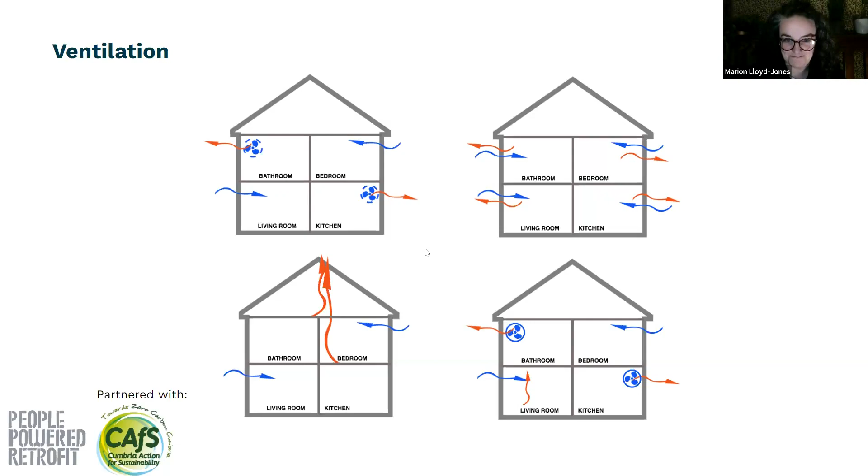I made it to the end. Okay, not too far over, I hope. Hopefully I'm not in too much trouble.

Okay, so to wrap up, it's been a bit of a whirlwind through retrofit. A whole house approach is needed. A house is a system - well, it's lots of overlapping systems interacting with each other. We've got fabric heat loss, ventilation, heating, lighting and appliances, and then tricksy people. All of these things interact, making it quite complicated, but manageable to deal with.

That can't be all I've told you - I've told you other things. When we do a retrofit project, we need to think about all these systems. Generally our approach should be fabric first. We want to reduce the heat loss through the fabric to keep the heat inside the building. We want to think about airtightness as part of reducing heat loss, and we need to think about ventilation so that once we've done some really good airtightness work, we're then supplying air and managing any moisture that is being created.

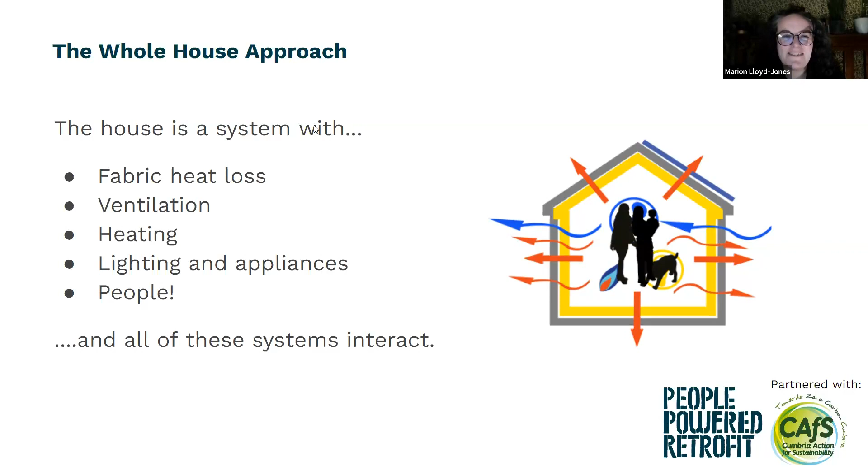There, we made it to the end. Did we have any questions that came up as we went? Thank you so much, Marion. It's a big topic, and you've given a brilliant introduction. So we do indeed have some questions - I can see a couple in the chat, and if anybody else wants to put questions in the chat or the Q&A, that would be great.

So one person has asked about single room MVHR. Well, yeah, single room heat recovery units - I haven't had much experience, we haven't had any projects that use them. I've had them explained to me a lot. You can have a whole house system that works with individual units. You need to think about it as a system for the entire house because all your rooms are connected. Rooms don't operate in isolation. I would want a system that has been designed properly - any system should be designed properly by somebody who really understands it. It may or may not consist of individual units in lots of different places.

One through the wall fan with heat recovery does not make a ventilation system, I think is the answer to that. I suppose sometimes people are just replacing an old extract fan in a bathroom. Now, the extract fan would have dragged cold air through wherever in the house it could get in, and it would have extracted it and thrown it out through the hole in the bathroom wall. So that has some merits in that it's drawing air through your whole house, or drawing air out of your house. But it would also be taking the heat out with it.